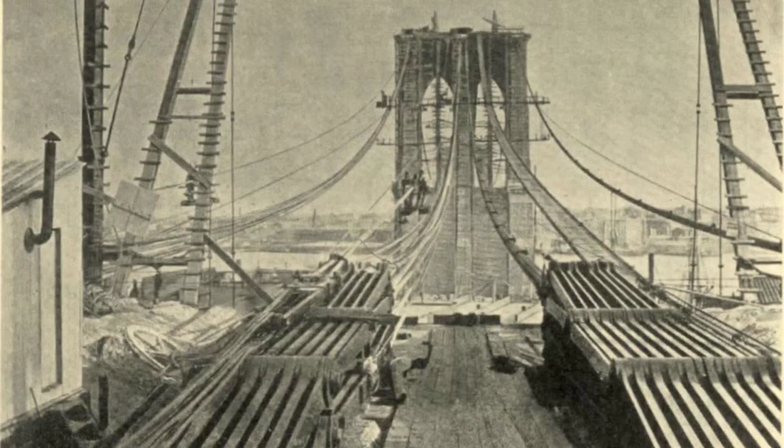John Augustus Roebling arrived in New York with a plan that defied the limits of 19th-century engineering. Born in Prussia and trained as an engineer, Roebling had already built his reputation on projects like the Cincinnati-Covington Bridge, once the world's longest suspension span. But the Brooklyn Bridge would surpass anything seen before.

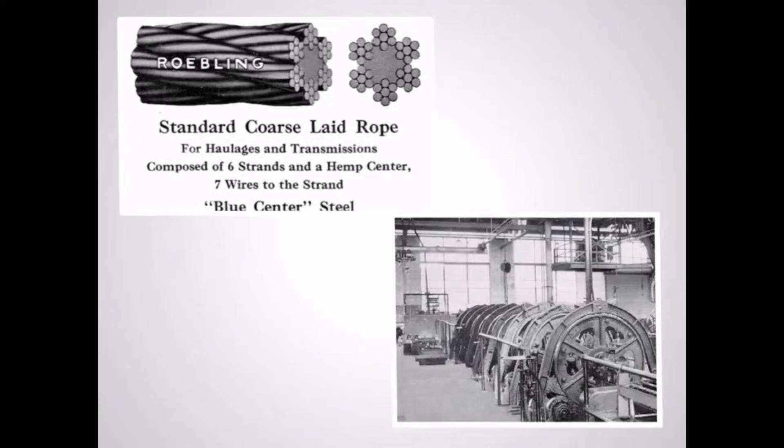His proposal called for a main span stretching 1,595 feet across the East River, a distance many believed impossible to cross with a single sweep of cable and steel. Roebling's design relied on his own invention, twisted steel wire rope, capable of carrying loads far beyond what iron chains could bear. Each of the four main cables would be 15 3/4 inches thick, spun from thousands of wires, anchored in stone towers that would rise 276 feet above the river.

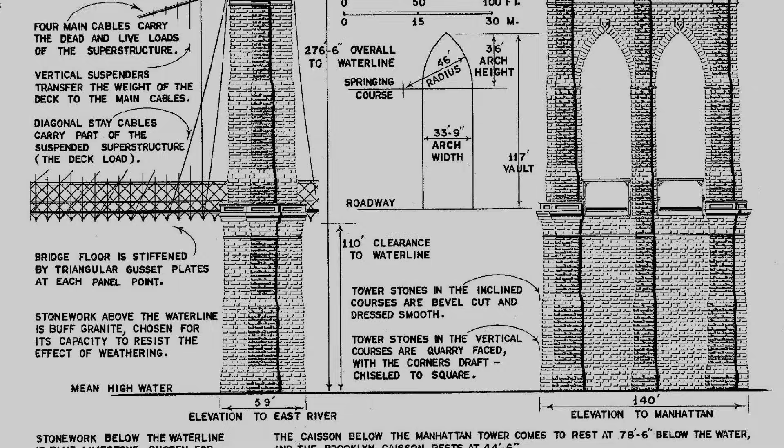The towers themselves, built from granite and limestone, would stand taller than any structure in Brooklyn or Manhattan. Roebling insisted on a safety margin that dwarfed the standards of his day, calculating the bridge could withstand the weight of the heaviest traffic for generations.

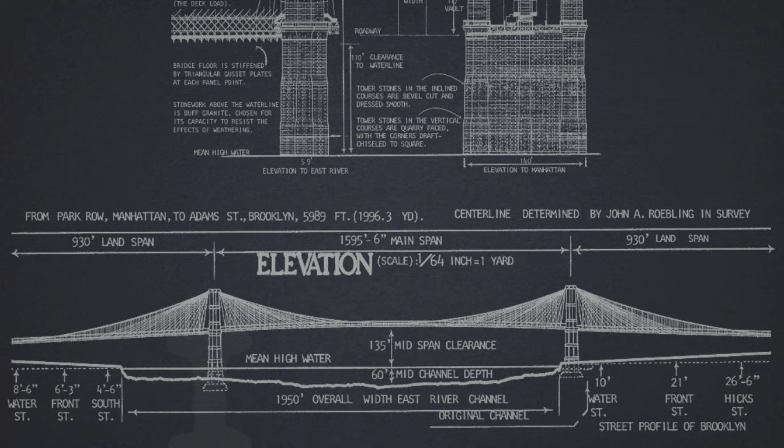The bridge was meant to do more than connect two cities. It would unite two worlds, transforming the daily lives of tens of thousands who relied on slow, crowded ferries to cross the water. The New York Bridge Company backed Roebling's vision, granting him the title of chief engineer in 1867. Maps, sketches, and prospectuses circulated through city halls and newspapers, promising a future where commerce and community flowed freely between boroughs. For Roebling, the bridge was not just an engineering challenge, but a monument to human ambition, built to endure long after its builders were gone.

On a humid afternoon in late June 1869, John Roebling stood at the edge of the East River, marking the precise spot for the Brooklyn Tower. A ferry drifting in at Fulton Slip pressed his right foot against a wooden piling. The force shattered bone and flesh in an instant. Witnesses rushed him away from the water, carrying him to his son Washington's home on Hicks Street. There, surgeons removed several mangled toes without anesthetic, following the best practice they knew.

Infection was an ever-present threat, but Roebling dismissed the doctor's warnings. He insisted on treating the wound himself, pouring cold well water over the injury, trusting in hydrotherapy and his own stubborn resolve. Within days, his condition worsened. Muscles stiffened, his jaw locked, and spasms racked his body. The symptoms were unmistakable: tetanus, a disease that medicine in 1869 could not cure.

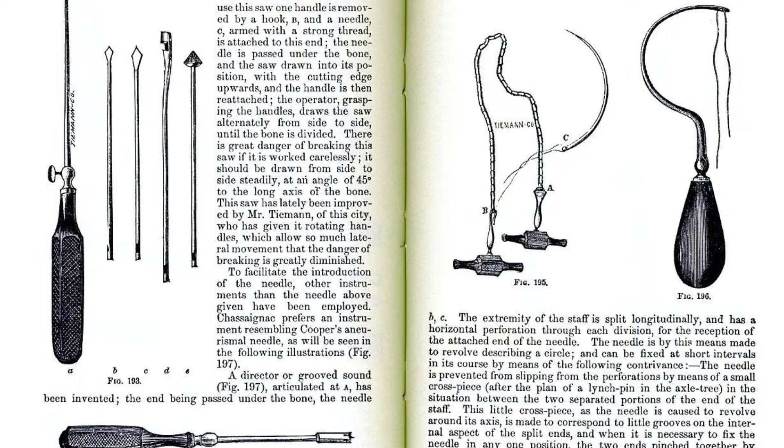Newspapers like the Brooklyn Daily Eagle reported on the chief engineer's decline, describing the accident and his refusal to accept further medical intervention. Family letters from the period reveal a man aware of his fate. Roebling reportedly told those around him, "I have the plague." On July 22nd, just 24 days after the accident, John Roebling died in his Brooklyn Heights home.

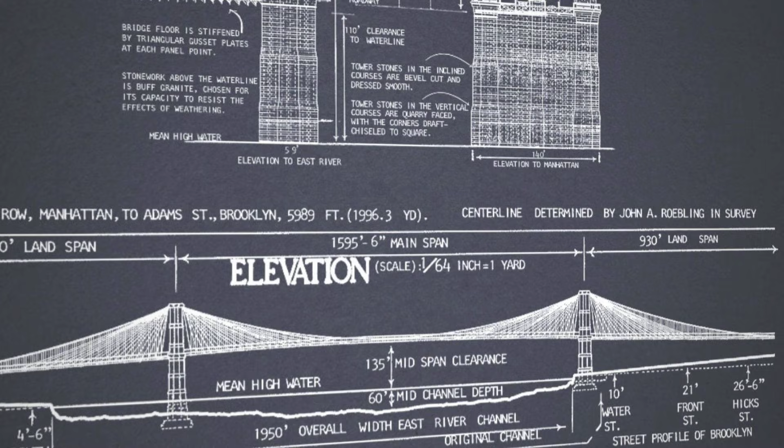The bridge that carried his name had not yet broken ground. His death left the greatest engineering project in America without its architect, and the city's boldest promise suddenly seemed fragile. The foundation for the Brooklyn Bridge had claimed its first life before the first stone was ever set.

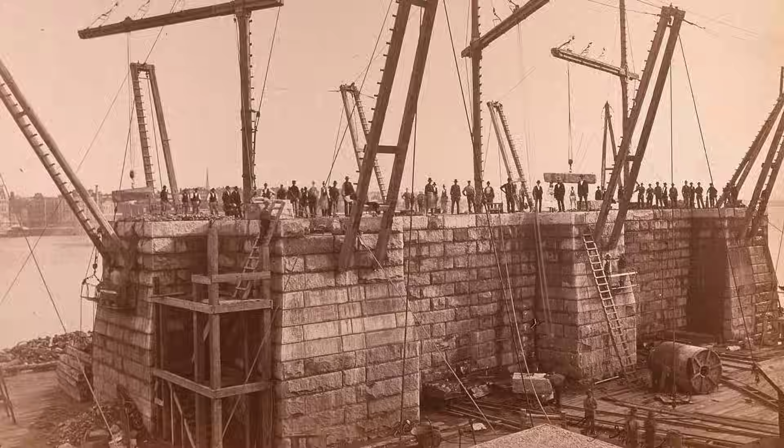Only days after John Roebling's death, the trustees of the New York Bridge Company faced a decision that would determine the project's future. The plans were intact, but the mind that shaped them was gone. Into this vacuum stepped Washington Augustus Roebling, John's eldest son, already steeped in the technical demands of the bridge and no stranger to adversity. Washington had studied engineering at Rensselaer Polytechnic Institute, then tested his skills as a Union officer building pontoon bridges under fire during the Civil War.

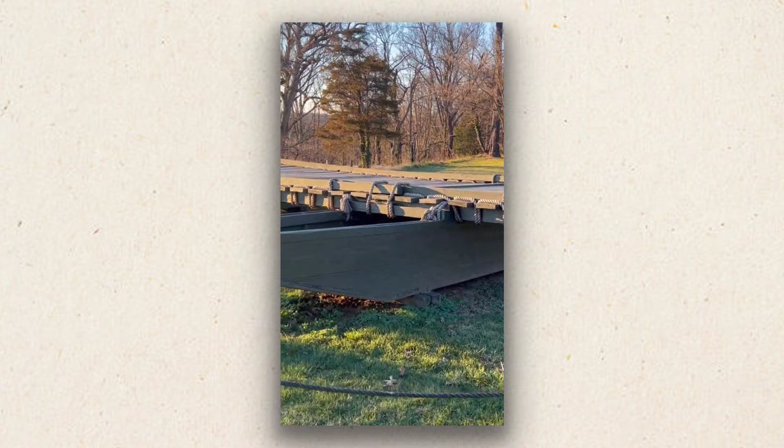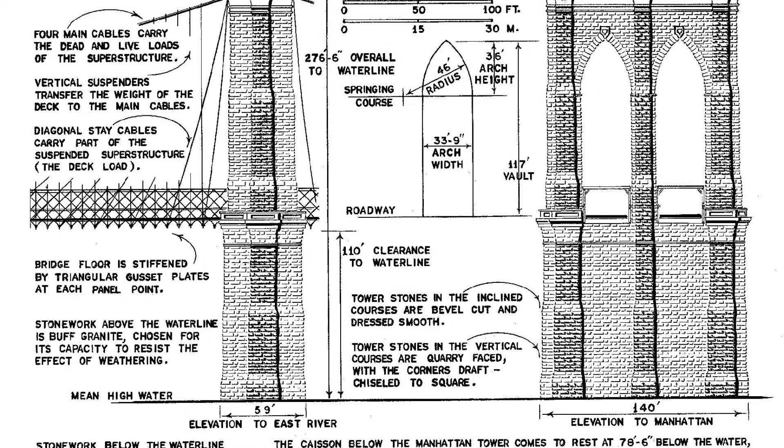He had worked beside his father on earlier suspension projects and spent months on the Brooklyn Bridge surveys, learning every detail of the design. In August 1869, the board voted to appoint him chief engineer, entrusting him with the authority his father once held. The formal resolution cited his experience and his intimate knowledge of the plans. Washington accepted the role with a quiet resolve. He later wrote that he had determined at once to carry out his father's cherished plan.

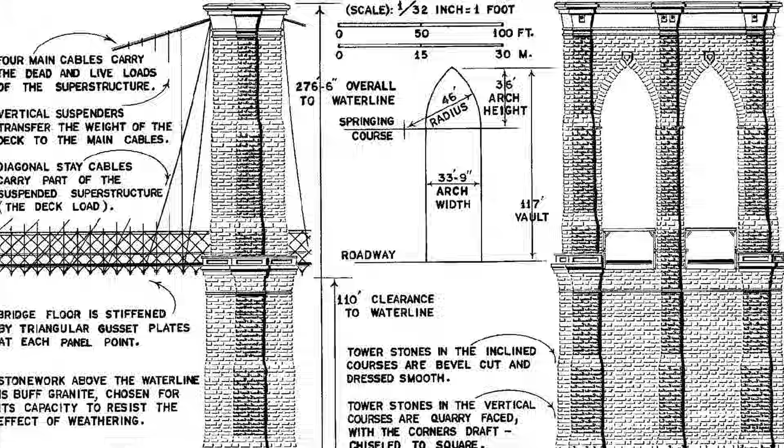He moved quickly to steady the project, reassuring investors and city officials that construction would proceed without delay. Washington's command was not a mere inheritance. It was a deliberate continuation of expertise, discipline, and ambition. He reassembled the engineering team, reviewed every calculation, and began organizing the labor force. The bridge's momentum returned, anchored by a new leader who understood both the technical challenges ahead and the personal cost of failure. Washington's appointment ensured the Roebling vision would not die with its originator.

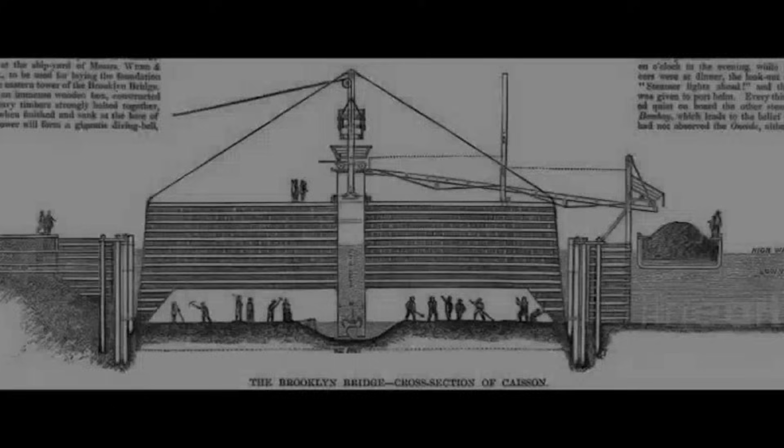Under his direction, preparations advanced toward the first great challenge, laying the foundations beneath the East River. To build a bridge across the East River, engineers needed to reach solid ground buried beneath layers of silt and water. The answer came in the form of giant wooden caissons, sealed pressurized chambers sunk to the riverbed. Each caisson was a massive box, its sides and roof made from thick timbers, its bottom left open.

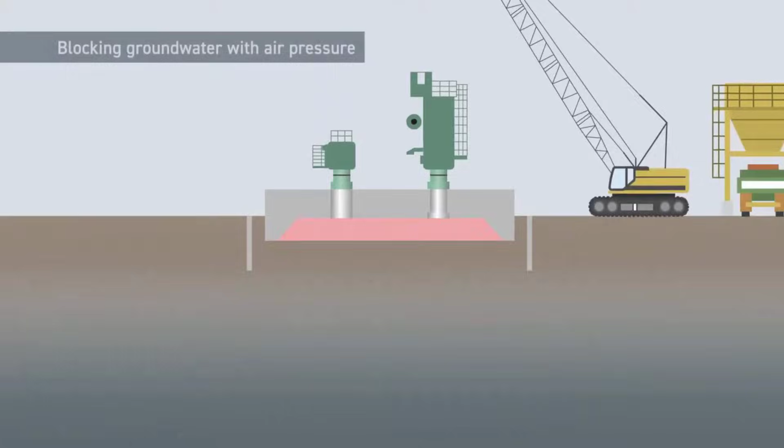Workers entered through airlocks, stepping into an environment unlike anything most had ever known. Inside, compressed air forced water and mud away, creating a dry workspace deep below the river's surface. The Brooklyn caisson settled at 44.5 feet beneath high water, while the Manhattan side plunged even deeper, over 70 feet down, where the pressure more than doubled what men experienced at street level.

Every shift inside the caisson meant hours in a world of constant noise and humidity, where the air felt thick and heavy. Lanterns burned dimly in the haze, illuminating teams of men wielding shovels and picks, scraping away mud and rock. As the earth was removed, the box itself slowly sank, guided by the weight of granite blocks stacked above. The deeper the descent, the greater the air pressure needed to keep the river at bay.

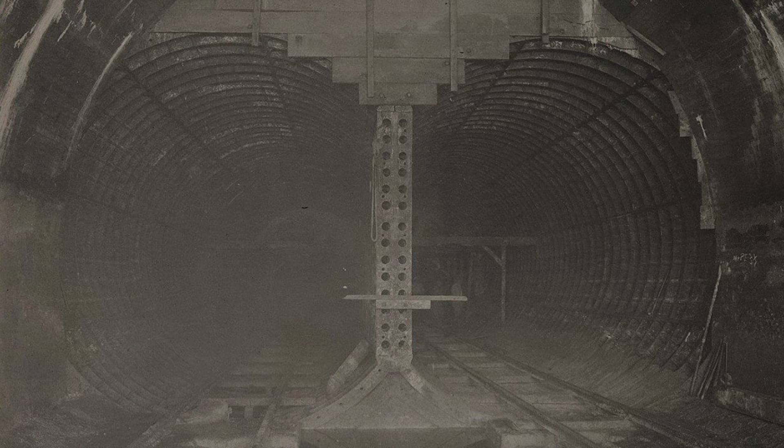At full depth, the pressure inside the Manhattan caisson reached nearly 35 pounds per square inch, almost 3 times atmospheric pressure. Each entry or exit required careful passage through an airlock, a small chamber where pressure could be raised or lowered in stages. The caisson method allowed the bridge's foundations to reach stable bedrock, anchoring the immense towers that would support the span. It was a feat of ingenuity, one that demanded both technical precision and human endurance.

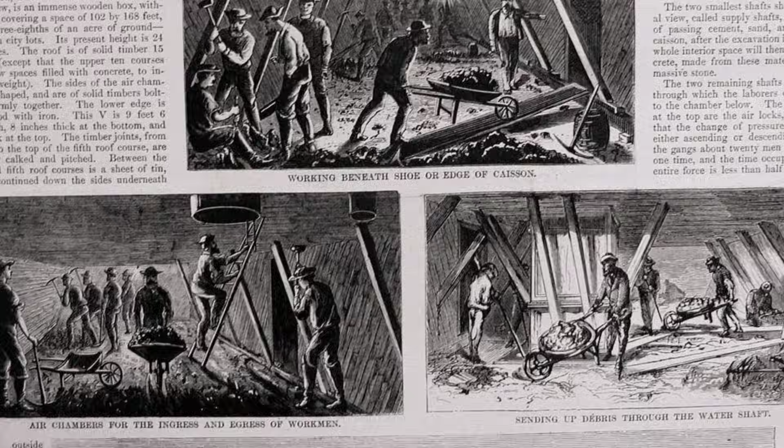The method was new to American engineering on this scale, and its risks were not fully understood. Yet without these pressurized chambers, the Brooklyn Bridge could not have risen from the river. The caissons made the impossible possible, but inside their walls, the dangers multiplied with every foot gained.

Inside the caissons, the air pressed in from all sides, thick and humid, making every breath feel heavier than the last. Men worked by lantern light, shoveling mud and stone in shifts that stretched for hours beneath the river. At first, the danger seemed obvious: falling timbers, sudden leaks, the ever-present risk of fire.

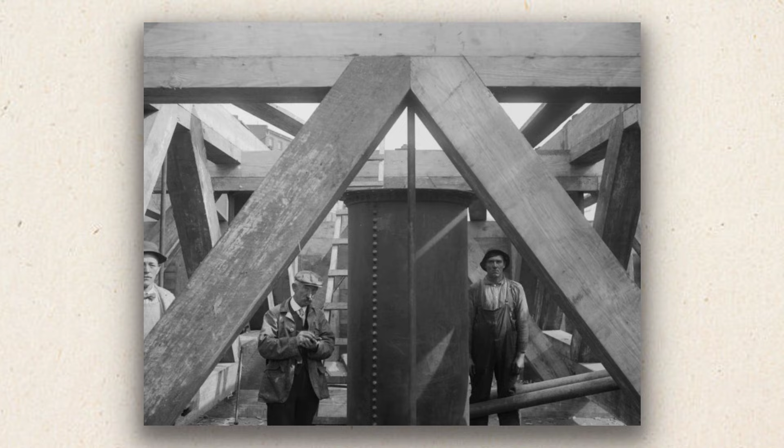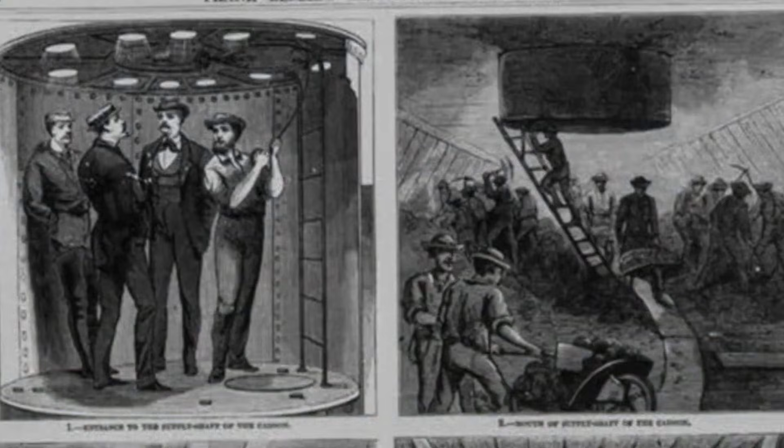But soon a new threat surfaced, one that no one could see or predict. Laborers began to complain of stabbing pains in their joints, especially after climbing up from the depths. Others staggered out of the airlocks only to collapse on the dock, their legs refusing to move, their arms numb and useless. Some never regained feeling, their bodies left twisted and weak. A few died within days, their symptoms a mystery to the doctors called to help.

Superintendents recorded these cases in their daily logs: headaches, dizziness, crippling pain, and in the worst attacks, paralysis that crept from the limbs to the chest. The term caisson disease appeared in medical reports and newspaper columns, but no one agreed on a cause. Some physicians blamed the compressed air itself, while others suspected poison or overwork. Theories multiplied, but answers were scarce.

There were no protocols for treatment, no guidelines for how long a man could safely work below before returning to normal air. Rest was the only remedy, and it rarely worked. The bridge's foundation, once seen as a marvel of modern engineering, now hid a growing hazard. Each descent into the caisson carried a risk that could not be measured or managed.

For every man who emerged unscathed, another suffered in silence, his pain misunderstood or dismissed. The invisible danger haunted the workforce, turning innovation into a source of dread. The project pressed on, but the cost, still uncounted, rose with every shift below the river.

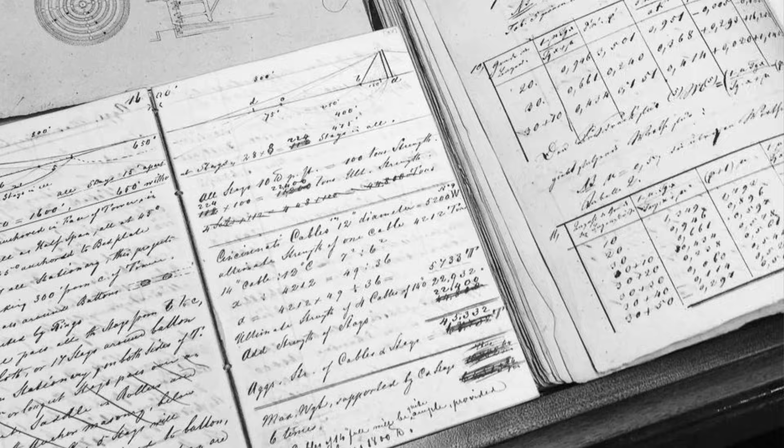Washington Roebling believed that leadership meant sharing every danger with his men. Day after day, he entered the caissons himself, descending through the airlocks into the stifling chambers beneath the river. The pressure inside was immense, more than 3 times what he would feel above ground. Even experienced laborers dreaded the descent, but Washington insisted on being present for every major challenge, logging each shift in his battered notebook.

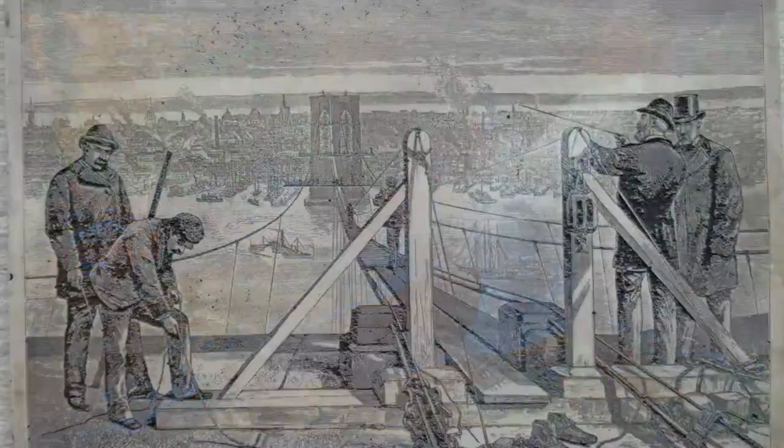He spent hours supervising as the teams chipped away at mud and stone, pushing the caissons deeper in search of bedrock. The air inside was thick and hot, the roar of machinery constant, the threat of disaster always close. In early 1872, after months of repeated exposure, Washington began to feel a peculiar numbness in his legs and back. He brushed it off as fatigue, unwilling to let the project slow.

Then came a particularly long day in the Manhattan caisson, when delays forced him to stay below for far longer than any doctor would have advised. By the time he surfaced, his body was racked with pain and dizziness. Within hours, he collapsed, unable to move his limbs or catch his breath.

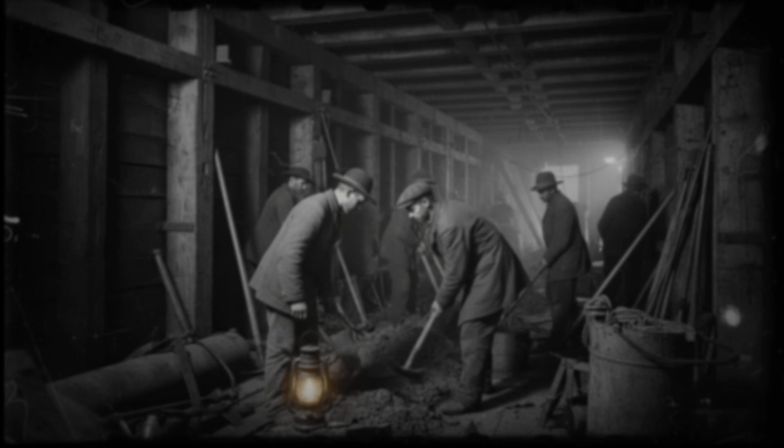Doctors struggled to explain what had happened. The term caisson disease was still new, and theories about its cause ranged from overwork to mysterious poisons in the air. What they could see was unmistakable. The chief engineer, once so vigorous, was now paralyzed and bedridden.

Washington's willingness to face the same risks as his men had brought him to the brink. The bridge's most important mind was suddenly cut off from the worksite, his future uncertain, his sacrifice written into the very stones rising above the river.

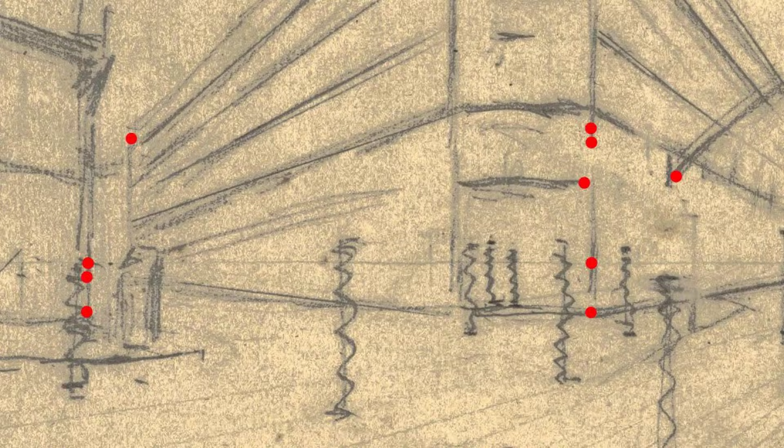Washington Roebling spent his days confined to a second-floor room at 110 Columbia Heights, a few blocks from the bridge's rising towers. He could no longer visit the site or stand among the workers, but the project never left his sight. From his bed, he kept watch through a telescope, recording the slow progress of stone and cable as they crept skyward. Sheets of technical notes and letters piled up on his bedside table, each one filled with calculations, corrections, and instructions for the engineers below.

Every week, messengers carried Washington's handwritten directives to the bridge office, while trusted assistants returned with updates and questions. The chief engineer's presence lingered in every detail, even as his body refused to heal.

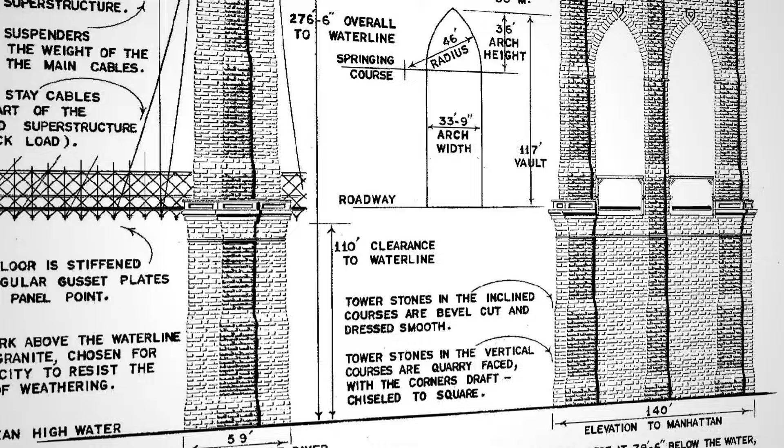The irony was unmistakable. The same caissons that had anchored the bridge to bedrock had robbed Washington of his mobility. The man who once walked the length of the riverbed now measured progress from a distance, his world reduced to the view framed by his bedroom window. Yet his mind remained sharp, and his authority over the project was never in doubt. Engineers and contractors deferred to his expertise, knowing that every major decision still passed through his hands.

Washington's private struggle shaped the daily reality of the bridge's construction. His absence on the worksite left a gap that could not be filled by any assistant or foreman. The bridge pressed forward, but the task of translating his vision into action would soon fall to someone else in the Roebling household. Emily Roebling stepped into a world few women of her era were allowed to enter.

With Washington confined to his bed, she became the vital link between the chief engineer and the sprawling construction site. Each morning, Emily gathered notes, diagrams, and technical instructions from her husband's bedside, absorbing the language of mathematics, materials science, and cable engineering. Letters from the period show her handwriting filling the margins, calculations checked, questions answered, revisions drafted for the men waiting at the towers.

Board meeting records from the 1870s list her attendance among engineers and trustees, a rare sight in any public project of the time. She did not simply relay messages, she argued specifications, negotiated with suppliers, and defended Washington's decisions before skeptical officials. Her mastery of the technical details became clear in moments of crisis, when she exposed fraudulent steel wire shipments and insisted on proper standards.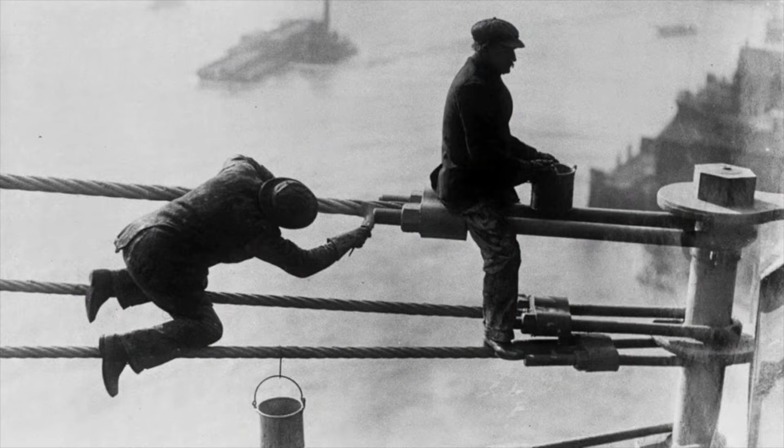Contractors and foremen came to trust her judgment, knowing she spoke with the authority of the Roebling name and her own growing expertise. For over a decade, Emily managed the daily operations that kept the bridge advancing. She was present for every milestone, from the spinning of the first cable to the final stone set in place.

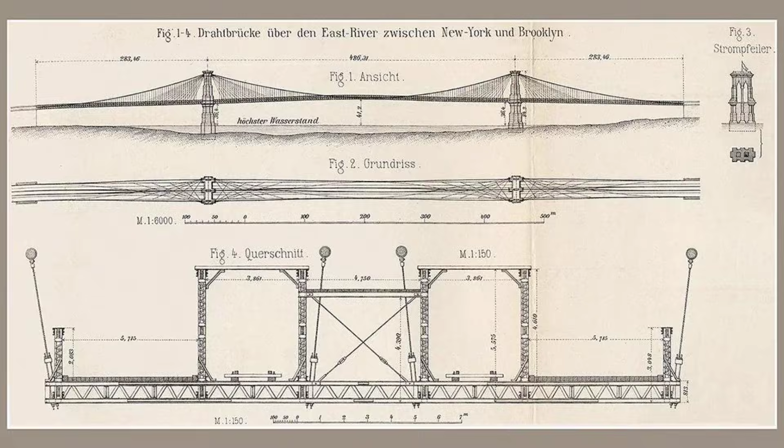On opening day in May 1883, Emily crossed the completed span before anyone else, riding in a carriage and carrying a rooster as a symbol of triumph. Her journey was more than ceremonial. It was the culmination of years spent translating vision into reality, proving that leadership could come from unexpected places, and that in the shadow of tragedy, new strength could rise.

The Brooklyn Bridge stands as a monument to vision, but its stones are set in sacrifice. Over 14 years of construction, the work claimed at least 20 lives, some lost to the silent agony of caisson disease, others to falls, explosions, or accidents high above the river. Names like John Myers and Patrick McGovern flickered briefly in the city's newspapers, their deaths recorded in a few lines before fading into the background of progress.

Many more left the site permanently disabled, their families left to struggle without support. Coroner reports described bodies marked by paralysis and pain, symptoms that remained a medical mystery for years. The bridge's foundations, dug by men who braved the dark and the pressure, became a quiet graveyard beneath the East River. Yet on May 24, 1883, the city turned out in celebration.

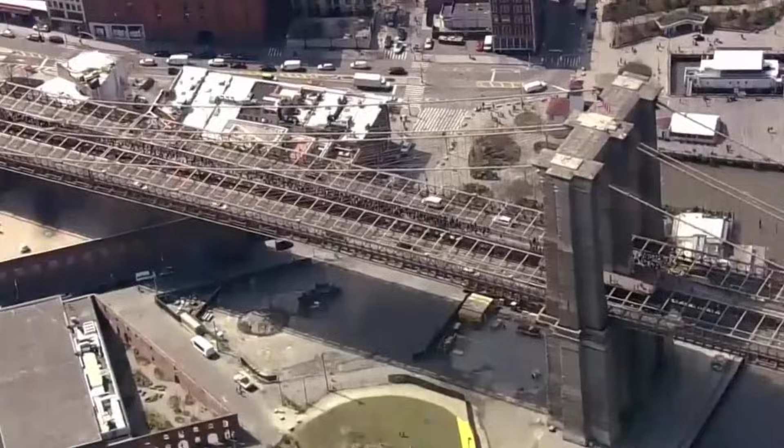Flags lined the approaches, and crowds surged onto the new span, eager to cross from Brooklyn to Manhattan on foot. President Chester Arthur and Mayor Franklin Edson led the procession, followed by a parade of dignitaries, marching bands, and veterans. Emily Warren Roebling, who had carried the project through its darkest hours, was the first to ride across carrying a rooster as a symbol of victory.

In that moment, the bridge was more than an engineering feat. It was a promise fulfilled, a link between worlds. But beneath the music and the speeches, the cost lingered, written in the obituaries and the empty places at dinner tables across the city. The Brooklyn Bridge endures as more than stone and steel. It is a ledger of sacrifice, written in suffering and resolve.

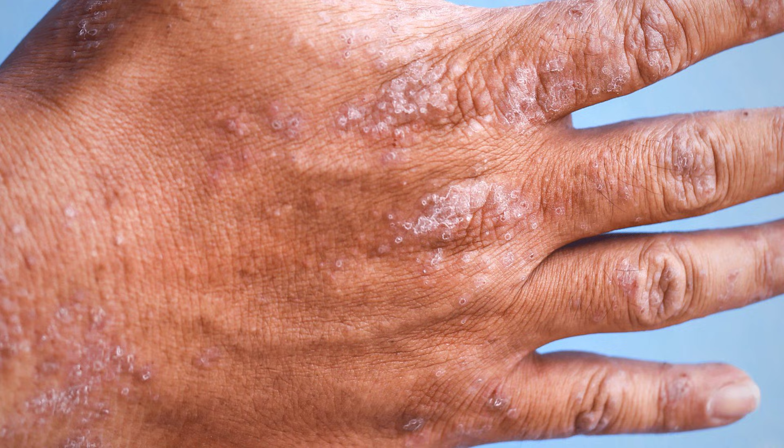Today, engineers still face risks that demand vigilance and humility. Every landmark we cross stands on lessons paid in lives and hardship. We inherit their ambition, but also their warning. Progress demands a human toll we must never ignore. What do you think we owe those who build our world?